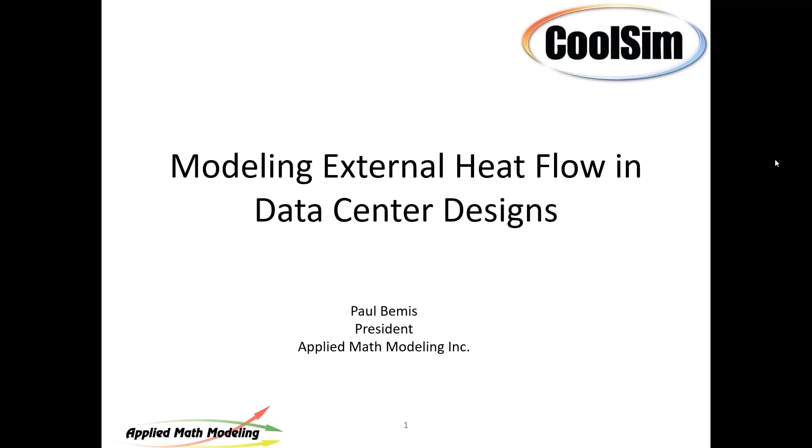We're talking about modeling external heat flows in data center designs.

A little bit about our company, Applied Math Modeling. Most of you know us at this point, we've been around for quite some time. We are a partner of the Ansys Corporation. We came out of that corporation where I was a senior executive for many years, responsible for their products. And this one we built in a bit of a skunk works while I was there, and agreed to take it private, a little small for them as a big corporation. So we are a partner of theirs now, and we deliver this solution in a SaaS model, software as a service, which is really quite nice, particularly for this kind of analysis we're doing today, because it tends to be computationally intensive and take some more time to solve than internal flow models. We are experts in the field of CFD, sales, development, support. We do consulting as well. We can build these models and run them for you if you choose, or you can use our CoolSim software and do it yourself. Either is effective.

So let's talk about modeling external heat. We've done a fairly good job inside the data center over the past 20 years. Things like hot aisle, cold aisle containment, variable speed fans have all contributed to the goal of getting the heat out of the building, out of the room. However, it's now outside, you've got a bunch of heat outside. And of course, given the cost of land and space, the architects typically - I don't want to single them out - but it's often a result that you have these locations outside the building that are made up of a bunch of heat exchangers. They could be chillers, they could be condensers, they could be whatever, but at the end of the day, we've got to get that heat out of the building and pump it into the outdoor air.

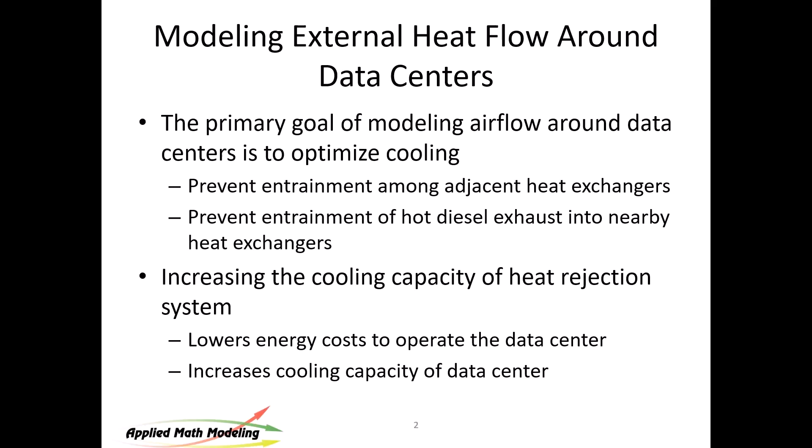So you need to be sensitive to the fact that under a prevailing wind condition, there is some probability that heat gets mixed up with your heat exchangers, which are actually often co-located, causing all kinds of issues that we're going to talk about today. And what happens is, if the cooling system gets warm inlet temps, if the temperature coming into the heat rejection system, the condenser itself, the heat exchanger, gets too high, then their cooling capacity drops off non-linearly. It's quite fast. So cooling capacity can be diminished if the heat from anywhere gets into the intake of these devices. So that's what we're going to talk about today.

Now, an example here is what you would normally see as a heat exchanger structure. This is just representative, you see over here, I've clipped one out. They all sort of look like this, whether they're chillers or condensers. Now, a chiller will have a box over here where the compressor sits, but it still has a big long array of these, and the more of these the better, because it's trying to dump heat to the atmosphere. And if you don't have to compress it, you can save a lot of money. So they use a lot of these. These are typically water to air heat exchangers, they don't have to be water, they can be something else. But there's certainly air on the outside, and they're dumping heat up through this vein on both sides and out through the top. So it's important that you know the physical dimensions of this, because you're going to build these. I'm going to teach you how to build these, and what the physical characteristics are - most importantly, mass flow rate and delta T. How much heat are you dumping?

Remember that the second equation of thermodynamics for convective heat transfer is that heat equals mass flow rate times specific heat of air times delta T. So it's these three elements, heat, mass flow, and delta T, assuming the density remains relatively constant, which can vary depending on temperature, that determines how much heat these devices can reject.

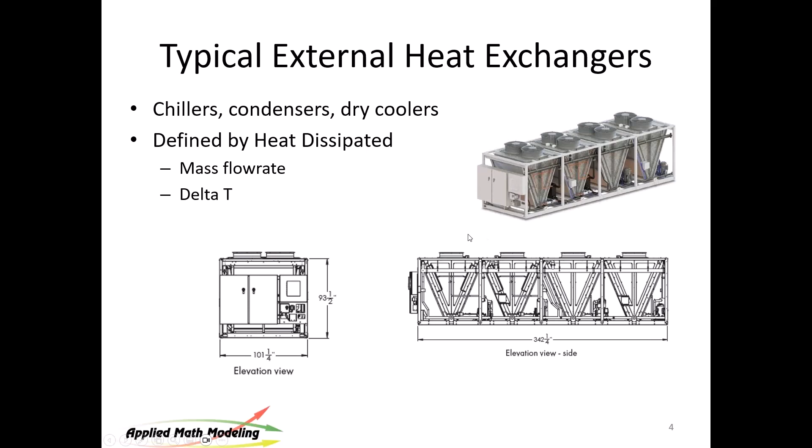The reason we're doing it rectilinear instead of as an angle is mesh size, mesh count. In CFD, we fill the volume with elements. We tend to fill them in CoolSim with hexes, so we're hex dominant, and if we use hexes, which are rectilinear in nature, then using a rectilinear structure will keep our mesh count low and give us fairly good results. So that's how we do it, and it works quite well.

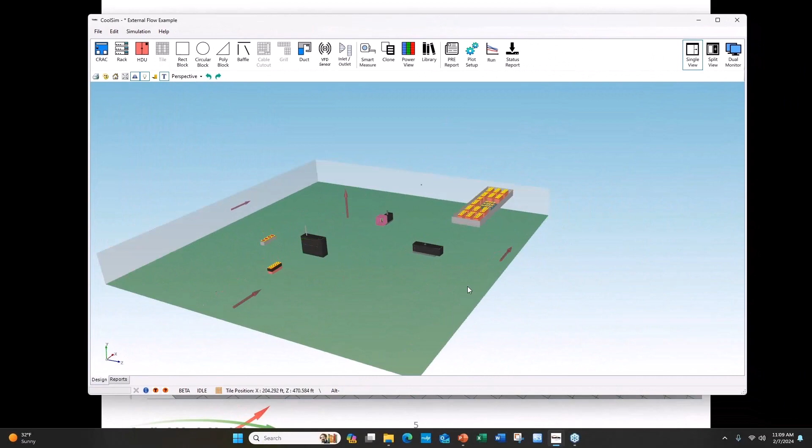So there's a basic structure. There are a number of these you can build, and you can build them different ways. This is one way to do it. What I'm going to do here is show you a couple of these using my CoolSim application. Now, whenever I do this, I run the risk of technical difficulties, so just bear with me if something breaks. Here I've got both generators and heat exchangers.

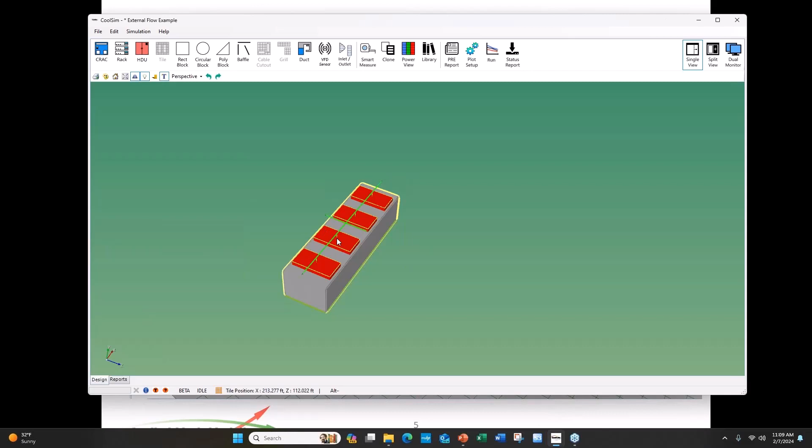Now, there's a couple ways you can do this. If there's a lot of them, and the data center is really quite complicated with a lot of equipment, you can represent the array as a singular structure across, one HDU instead of two. So I could take the array of 8 that I just showed you and turn it into an array of 4 and get an equivalent answer. Now here, this would be equivalent to 2 of the earlier fan structures I showed you, and you would therefore take the total mass flow rate and the total heat load and so forth and do it this way.

This isn't too bad, and it creates a smaller mesh. We're all about the mesh because that's where it takes a lot of time. Underneath this structure, what you do is simply set up a baffle, so you can see it comes down into that area, and you're pulling air up through. Essentially, all you want to know is the approximate average air temperature in that region.

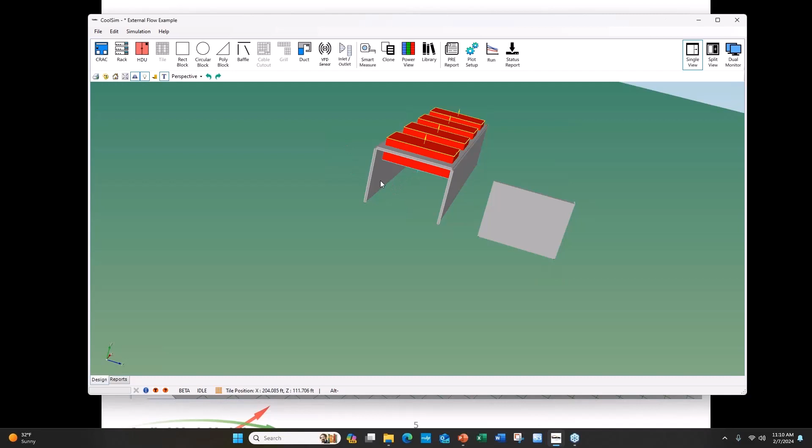That's all you're really looking for. You want to know wherever these are placed, if anything's getting in there, if any other entrainment from an adjacent device is getting in there in terms of heat. So you set these to leak.

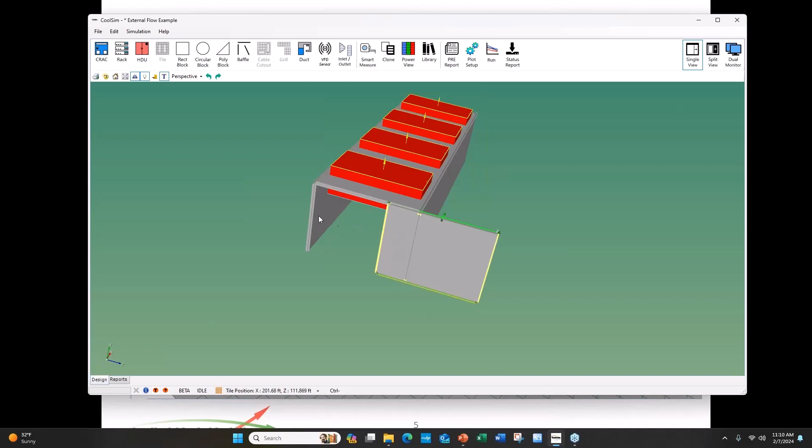The great thing here in CoolSim, we have leakage. The leakage here is set for 90%. You'll want to make sure that you line everything up nicely, and fortunately we have great tools for that. You can close gaps in the X direction, and then close gaps in Z. We have this nice close gaps feature that allows you to line those up nice and clean. If you're not lined up, you're going to get issues in meshing. Again, CFD is all about the mesh, getting the mesh right. We're hex dominant, and you're going to want to line things up as nicely as you can.

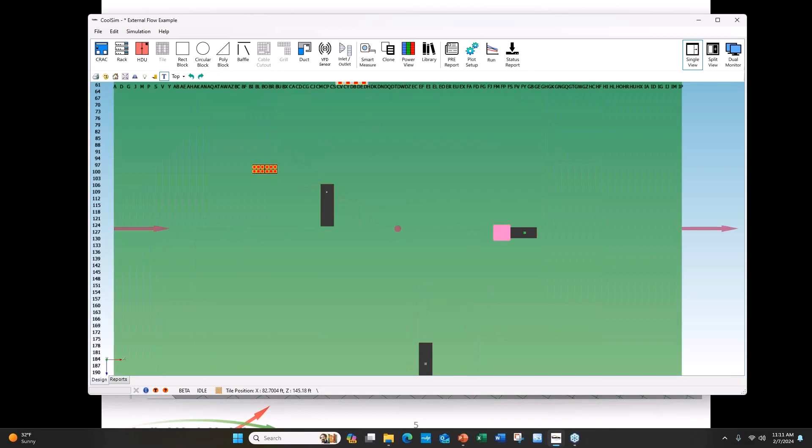The other nice thing about CoolSim is it allows grouping. Once you have a structure set up, like the one I just showed you, you can group it. I've just rubber banded it, and now there's my tree of what's in it, and I can group it. The great thing about a group is that it allows you to not only Control-C, Control-V the structure, the whole entire group, but it also allows you to clone it.

These are often lined up in data centers as a group or array, and this really helps the meshing to get these things lined up perfectly. A clone is just simply a copy with offset, copy paste with offset. So here I'm going to offset it - let's say 10 feet in the Z direction, and I'm going to put 3 of them in place. It allows you to just lay these things out really quickly.

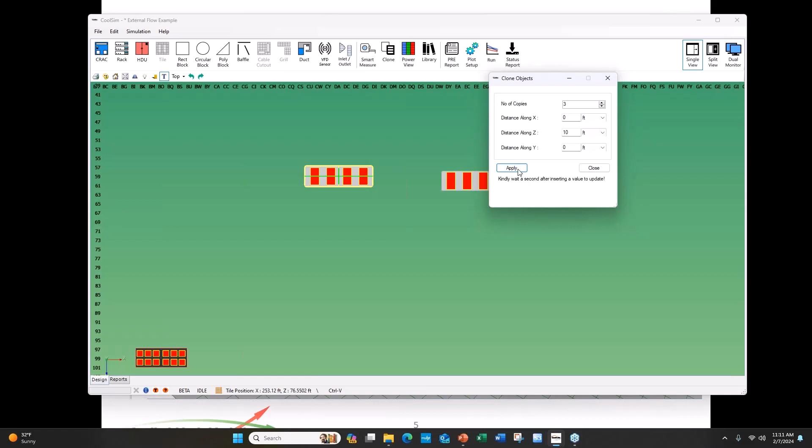The beauty of that is that you can set a model up really fast by creating just the base structure, getting it the way you want, and then cloning it. When you clone it, because I only cloned it in one axis, everything is exactly lined up perfectly, and the mesh is going to be as small as it can be without getting into trouble on that front.

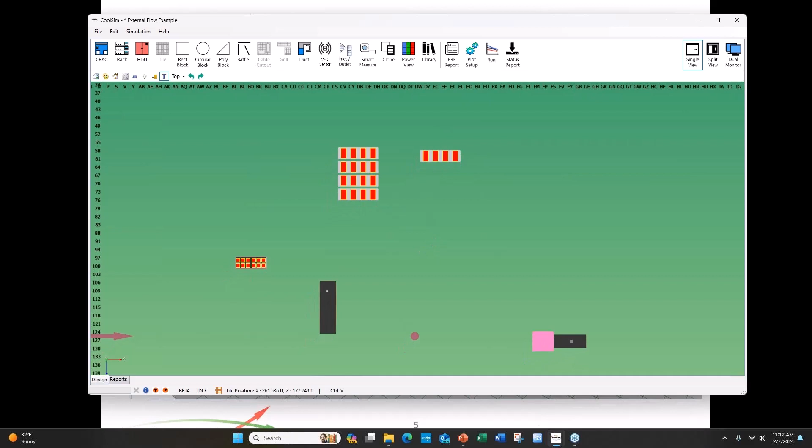So now that's just one type. Here's another one you can use - a structure like this one, which allows a little more detail. Here, the user has created a structure where there's a block at the bottom. You can ungroup this, take it apart. This is a block, as I showed you earlier, that they put in. You can make these devices the same height as the block, and they'll work fine, so make them coplanar. Then down below, leakage for the inlets.

That's how those structures are built in CoolSim. Let's switch to generators. Generators are another thing you're going to want to try to create and get to run. Generators are challenging because the sizing of them is quite disparate compared to the size of the domain itself, particularly the exhaust pipe. So these things tend to operate in this range.

This is a 3 megawatt device, a diesel generator. You see the intakes along here, so it's pulling in air. It uses turbochargers - you can see them here. It's usually a V16 type of device.

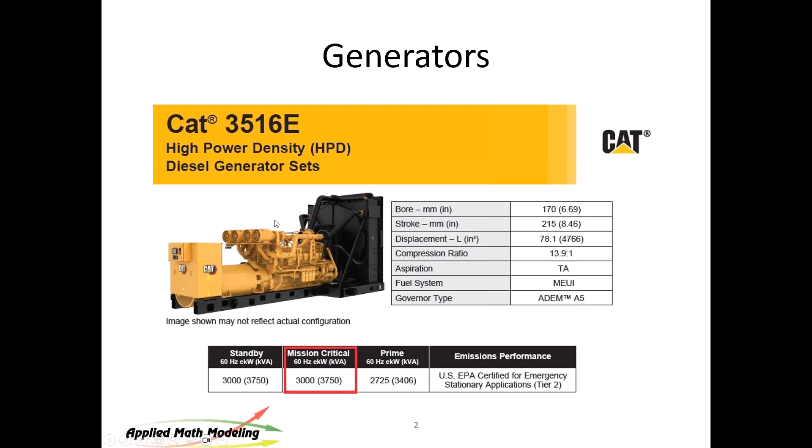There are 2 things you need to worry about when modeling it. One is the air coming through into and out of the heat exchangers that are cooling the engine itself. The other is the diesel exhaust. They generally don't sit like this, of course, in the outdoor environment - they come in a box. But this is the kind of data you want to look for.

This is the generator specification for that particular unit, and I've circled the things that are important right here. Radiator airflow - you need to know what the mass flow rate is of that inlet. You also need to know the approximate size of it, which you can usually get from the CAD drawing of it or the cut sheet of it.

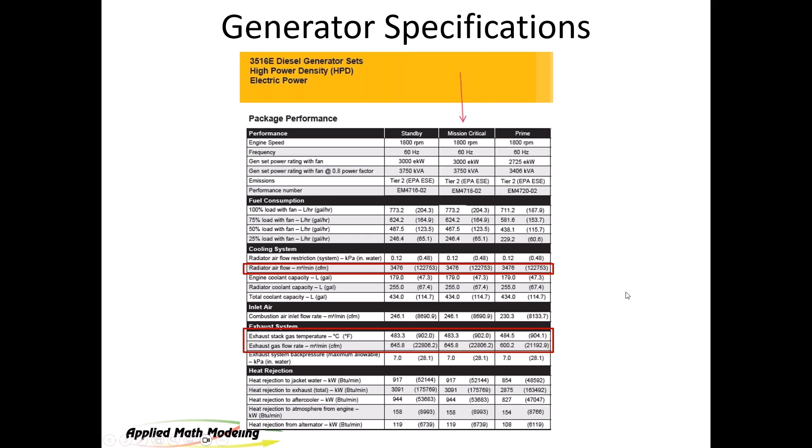You need to know the size and the mass flow rate, that'll determine the velocity. On the exhaust side, you need to know the mass flow rate, the approximate diameter or size of the exhaust outlet, and its mass flow rate. Those specs are given here. About 22,000 CFM is normal for an exhaust pipe of a diesel generator. 900 degrees is normal. They generally dump about 122K CFM of air to cool them.

They often look like this, in a box. On this one, there's cool air inlets in two locations, and then there'll be an outlet on the back. The packaging of them does vary a bit, and that's why it's difficult to build a single model of these things that represents the entire situation. It's much easier just to make one in CoolSim.

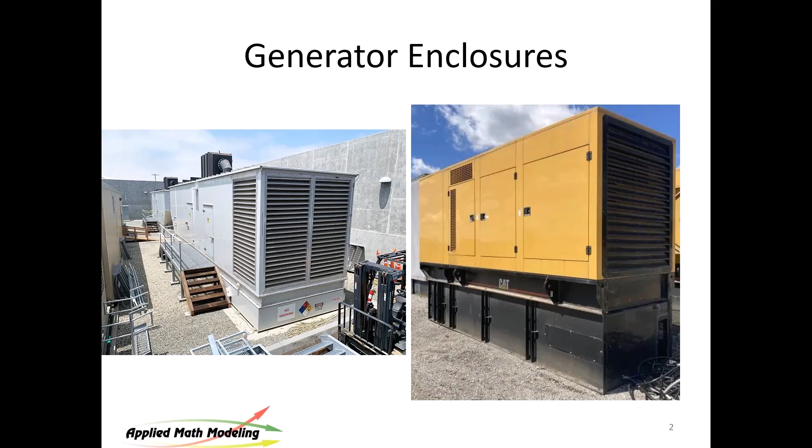Here's an example of how you make one. We have a new object in CoolSim called an inlet outlet. It's just a flat plane, and you can set the size. You can see there's one here on the intake, there's an exhaust right there, and there's one on the outtake.

Air's coming in through this end and being pulled, not literally, by the way. All these are surfaces on a block, so there's no air literally moving through the block. A common misunderstanding in CoolSim is that there's air moving through the block for racks or CRACs or anything. There are not. There's just a surface on the front end that we set a set of parameters on and do mathematics. This is all done mathematically.

So we're pulling air in here, and we're dumping it out here, and the most important one is the dump. The inlet you can set as well for the same parameters. You notice there's an arrow, it's pointing in because it's pulling it in. But pulling in doesn't bother quite so much as the exhaust.

The exhaust coming out is hot, so it's running at about 120 degrees Fahrenheit typically. It does depend on the design, but that's not unusual. Here this one's set for 110, and about 110 to 120,000 CFM. This one only has one outlet, though some have more than one outlet.

This one's very important as well, because this is the diesel exhaust. This is usually about 18 inches by 18 inches. You see it's represented again as a rectangle, but it's actually a round surface. To save cells in terms of mesh, we model it as a rectangle.

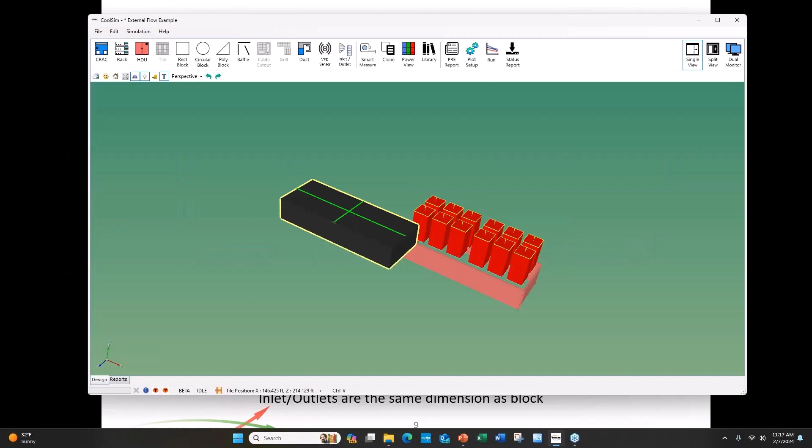So let me go back over to my CoolSim for a moment and show you how to build those. Let me just back up a little bit. This is CoolSim again. Here's an example of one right here.

Now this one has two inlets, one on either side. You can see those inlets, they're coplanar, and then the outlet right here. And then there's a block representing the chimney, and at the top of the block, there's an outlet.

And the way to, again, this is a group. Once you've built this, you can actually write it out. You can export it to a file as a CSO file as a group and read it in as a group. You can also save it to your local library if you want.

So if you want to build a few of these and put them in your local library, you can. I tend to write them out to a share drive, and that way it's on the network, and if I'm on a different machine, I can grab them from there. So I use a share drive for most of my CoolSim work.

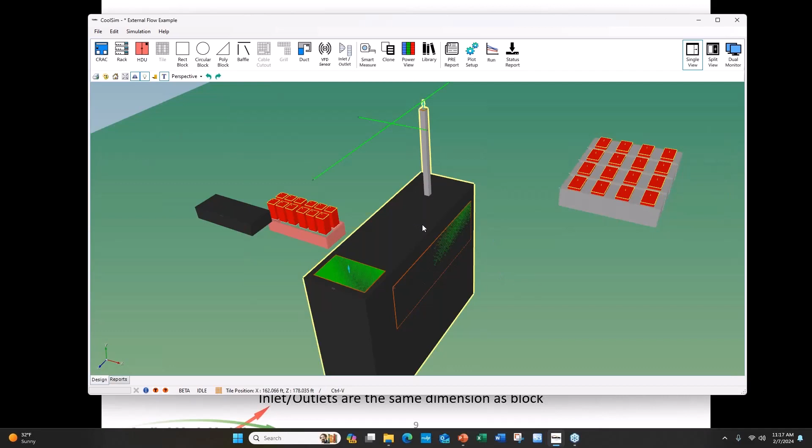But let's just ungroup this for a moment and take it apart and see how it was done. Now, these surfaces right here are a little difficult to pick sometimes, so what I tend to do is hide the block. We have a hide feature, and then you can get at all those surfaces.

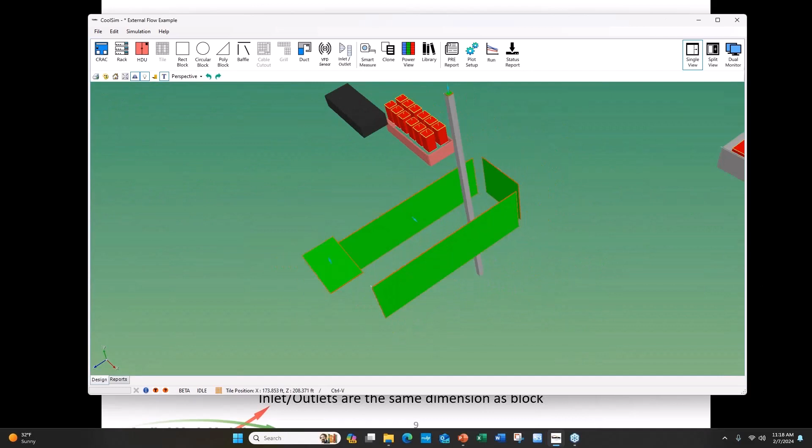You see this one has one outlet over here, this is the outlet. And then these are both inlets where the air comes in, and then it has another outlet at the top.

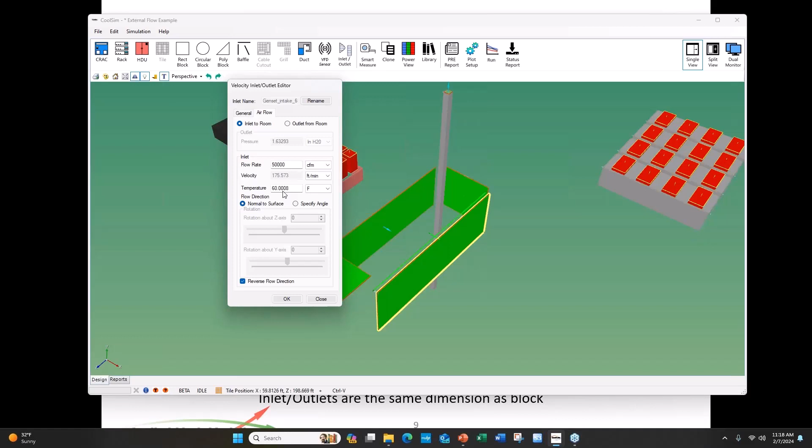It simply depends on how the original spec was set up. Once you set these parameters, you just click on them and set them to be whatever's necessary. This one has been divided in half, so 50,000 coming in. Temperature doesn't matter on the inlet since it's pulling it.

Only the outlet really matters. You see the outlet here is probably going to be in the range of 126, and this one's dumping at 109, probably a little low, but it depends on the spec of the device. So that's how you do that.

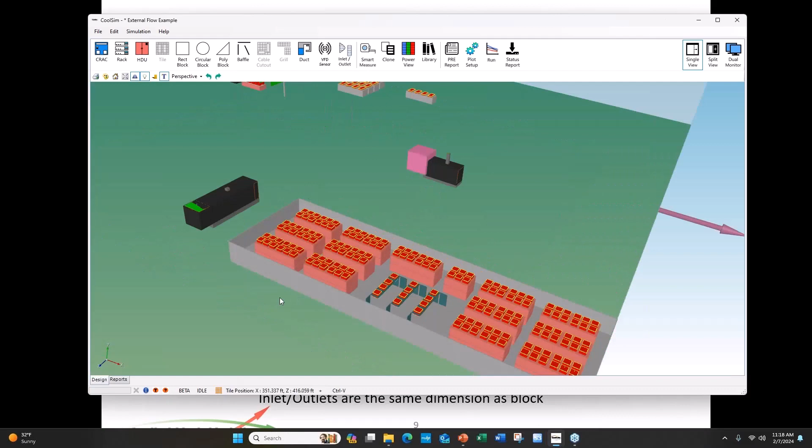There are different configurations. Here's an array of condensers up on a roof that I grabbed and wrote out at one point when I was working on a project. Here's a different one over here.

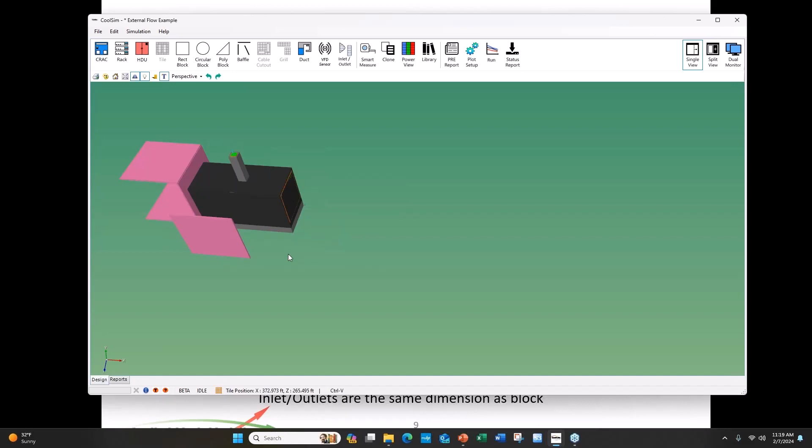In this case, they had some sort of inlet box, again built out of baffles, so you can ungroup this and pull them apart if you want, but that's how that one was built. You can write these out, save them, and read them in to use again in the future, or modify them and use them in a different style. Very easy to build, and with copy paste and cloning, it makes it nice to work with.

We've also most recently added to our group feature the ability to edit the group, which allows you to manipulate it, and you can also rotate that group. That's a handy feature to have in case they're not all lined up the same exact way.

So we've added a few features. This will be a growing area for us in terms of capability because this is becoming somewhat common. What we do in CoolSim is typically pull in functionality that we see common. If you start to see 80%, 90% of the time that kind of frequency of use, you start to say, okay, how do I automate it and bring it into CoolSim and make it something that can be easily used?

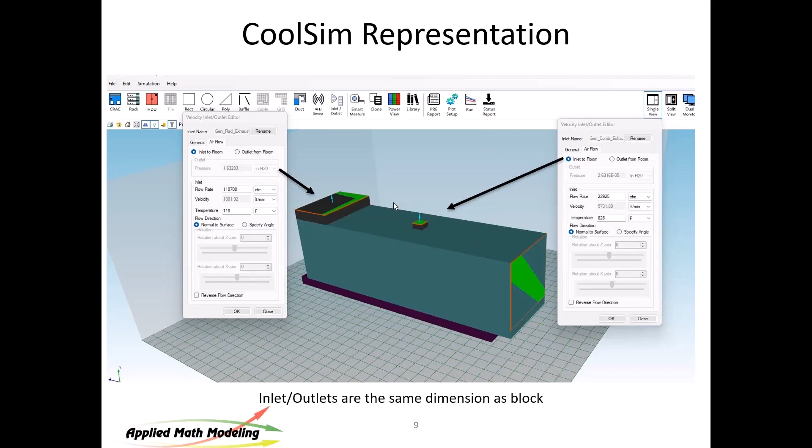This is an advanced topic typically. When I did this kind of work at Fluent, you'd do all this by hand—hand mesh it, hand process it, hand post it—and it takes days to do a model of this kind. But with CoolSim now, we're able to do this quickly, efficiently, and run various scenarios in hours. It's really a game changer.

Now, setting up the domain. When you set the domain up, this is the big room, the flow domain, as it's commonly called. We used to call it a bounding box when I was at Fluent. This is the size of the domain in which you're operating.

Typically, it should be 3 to 4 times the length of the building on the windward side—if you're a sailor, that's the side the wind comes from. The leeward side should be at least 3 times, because we've got to resolve the mesh.

The cells—remember, we break the volume up into, in this case, hexes, three-dimensional hexahedrons—and then we solve the conservation of mass, momentum, and energy on each surface and interpolate it across the cell, and we have to converge it to an accuracy of typically 10 to the minus fourth. So we're looking for good resolution, and to do that, you need enough size to do it.

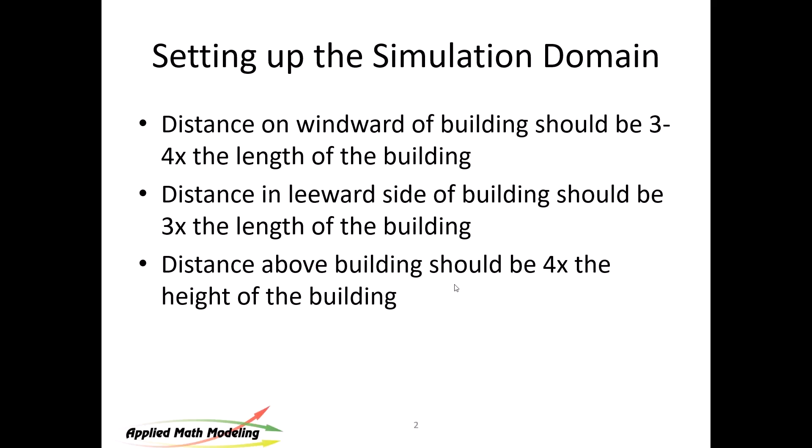And then on the top, 4 times the height of the building, because it is a three-dimensional block.

Now, we've also added in CoolSim some tools to allow you to set the wind condition up. This is normally done in a code like Fluent using unit vectors. If any of you have ever worked with unit vectors, it takes you back to your days of trigonometry—cosines, sines, transcendentals—and it's not trivial. So we came up with a method here with a nice little GUI.

So we have a compass and an air indicator. The compass can be offset, because oftentimes you'll lay a model out and find it's not quite facing north—the building's facing northeast. So this allows you to do a compass offset.

So you can just offset the whole orientation of the room, or the domain, with respect to the building, and then you can set the wind speed and condition according to whatever the prevailing wind conditions are for that particular region that you're working on.

You can set the velocity. We've got miles per hour, kilometers per hour, and a variety of other units. You can also set the air temperature in a variety of units.

And we have a hyperlink to wind data, which takes you to the NOAA site and allows you to look at some of NOAA's data on wind. Wind data can be specific to a particular location. I have a lot of global customers, and NOAA primarily focuses on US data, but there are also local windroses you can get for your geography, wherever you may happen to be, that allow you to understand prevailing wind.

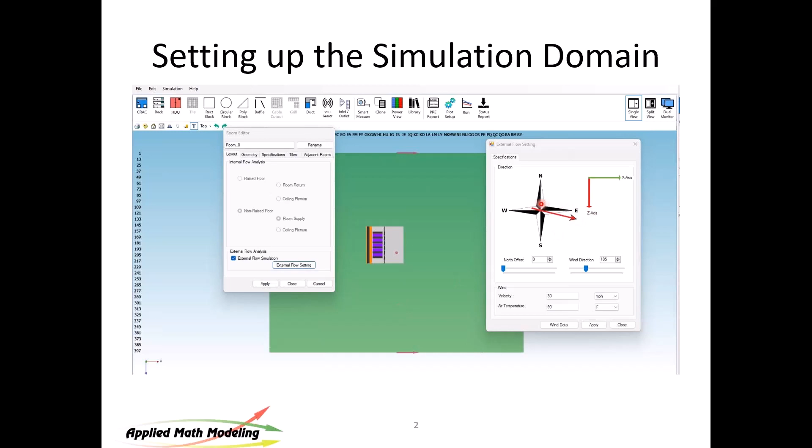These arrows you see in the domain show the wind direction. Right now it's slightly off from the east, so it's blowing left to right in this case, but you can set it any way you want.

You also have to orient your building with respect to the Earth. The best way to do this, the way I do it, is go to Google Earth or Google Earth Pro, dial in on the area where you want to put your data center, and take a cut of the CAD drawing of the data center and lay it into where they want to put it.

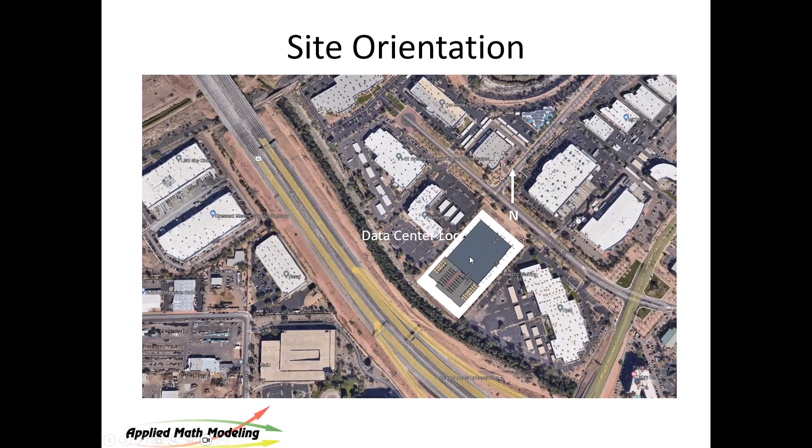In this case, this was a consulting project, so make sure the customer is consistent with where we're going to put it. Then find north using Google Earth, and find out the approximate orientation of the building relative to north. You're going to need to know that.

The other piece of information you're going to need, if you don't already have a prevailing wind in mind, is for setting up the simulation domain in terms of wind speed and wind velocity.

This is a windrose. I don't know how many of you know what a windrose is, so I thought I would show it to you. This windrose shows us the probability and strength of wind.

You can see that wind of 10 to 14 miles per hour occurs at some interval. That's probably the worst speed, but it only occurs a percentage of the time. In this case, about 6% of the time we've got a wind blowing from the east.

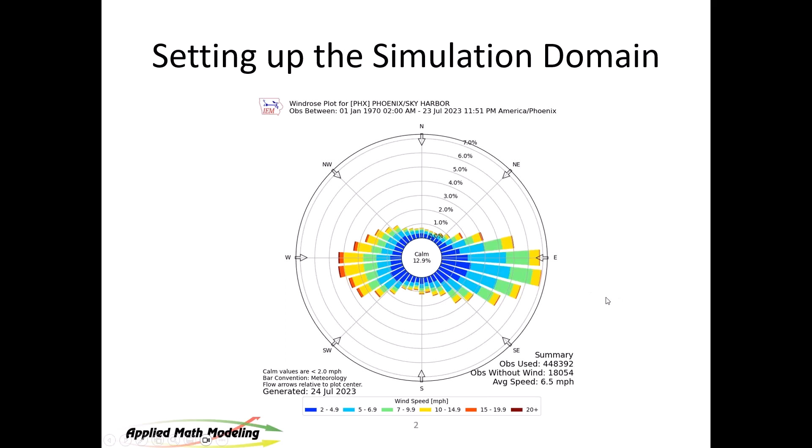Over here we've got a little red, meaning we're up to 15 miles an hour from the west, and that occurs some percentage of the time as well, about 4%. So if I were modeling this data center, I'd probably want to look at wind from the east and wind from the west, maybe offset them a little to understand the impact. Most of the time this place is calm, but you do have some wind conditions, and this happened to be Phoenix.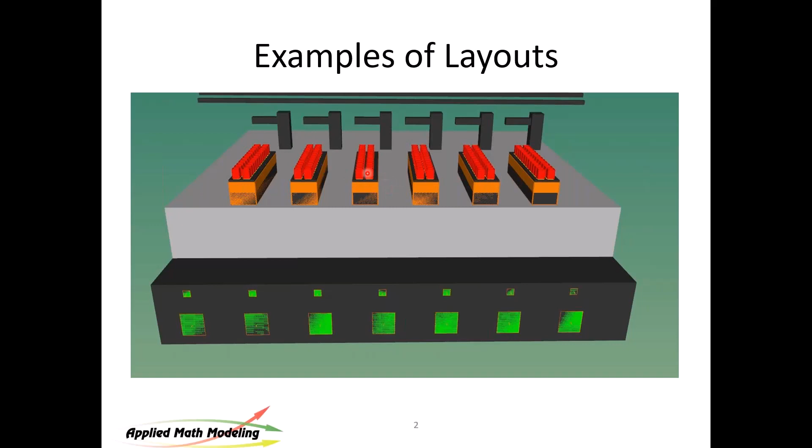And then, of course, you've got all the heat exchangers and chillers sitting up on the roof. So this one could be problematic, particularly with wind moving in this direction, perpendicular to that surface. It may blow this hot air up over the ledge, over the edge of this top building, and contaminate the leading edge of these devices.

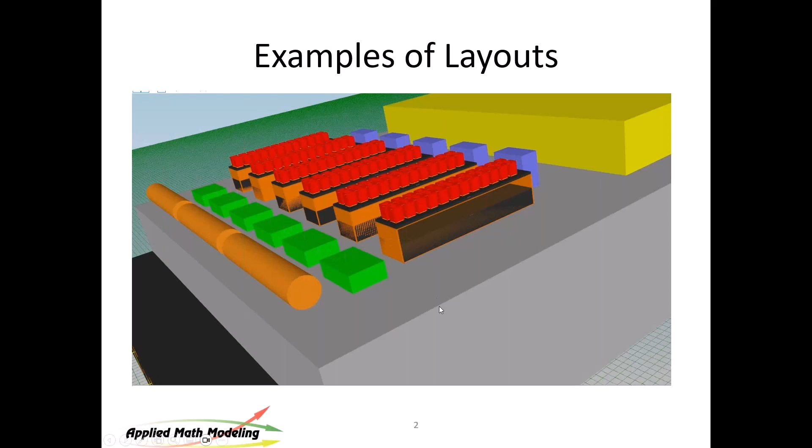Another example here. In this case, there's some structures in front of these heat exchangers. I think the goal here was to get these further back on the roof so they're not being contaminated. This is the same variation of the same design I showed you before - the generators are down here and they're blowing heat up over this edge. It's okay to have other stuff up there, but let's keep the heat exchangers as far away from that hot air as we can get.

So I'm going to give you some examples. Let me check the time, 10:28. Okay, we're making good progress here, and I haven't been looking at my questions.

Is the CoolSim software a modeler and a solver? Yes, it is, it does both - we create the model and solve it. That's the point, and I'm going to show you some solutions here.

And the mesh is automatic. We automatically mesh these - all you do in CoolSim is once you set this thing up, you press the go button and it meshes. We use meshing technology from Ansys, it's all Ansys stuff, state of the art. The latest Ansys releases is what we use in our solve, which allows us to ride that technology curve and deliver those solutions to you very cost effectively.

But we do it for you, based on experience we have in meshing - some 30-odd years of experience in meshing. So we set the meshes up and run them for you, and if it fails, you'll get a fallback, and we'll get copied on that fail and help you debug it. That's how we do it, and that improves the pipeline over time for others.

Okay, so let's take a look at some results and keep asking questions. I'll keep trying to look over there and answer them as we go.

So here's an example of entrainment. One of the nice things about CoolSim is we give you hyperlinks to output. So when you run a job, you not only get the solution done and get to look at it locally, as always, but you also get this hyperlink capability, which allows you to open and view it on the internet. This is something I've been trying to do nearly all my life in 3D graphics - to be able to view results on your phone. I can see this on my phone, and in fact, I can send this to you as well.

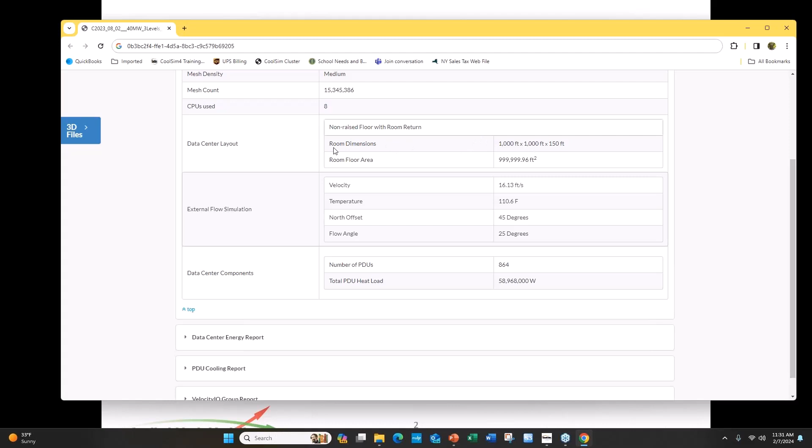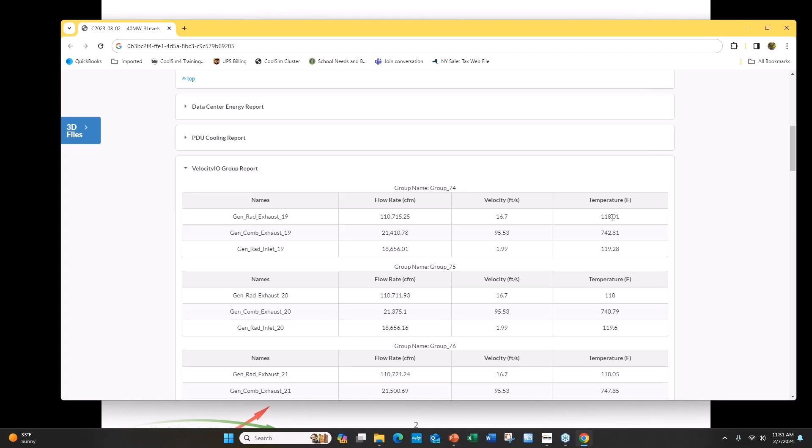It also gives you an independent report of the analytics of each one of the I/O devices. Here's the generator, with inlets and outlets and temperatures. You see the exhaust is flowing at 700 Fahrenheit, and the exhaust of the heat exchangers themselves is running at 118. So this is all the analytical data over here.

Here's the PDUs dumping heat. You can see they're running at about 17,000. We've got a delta T of about 14 degrees there, and we're dumping 68 kW per entity.

But the most revealing is this one down here called Pathlines—pathlines from racks and PDUs. Again, this is a new release, so these things are growing.

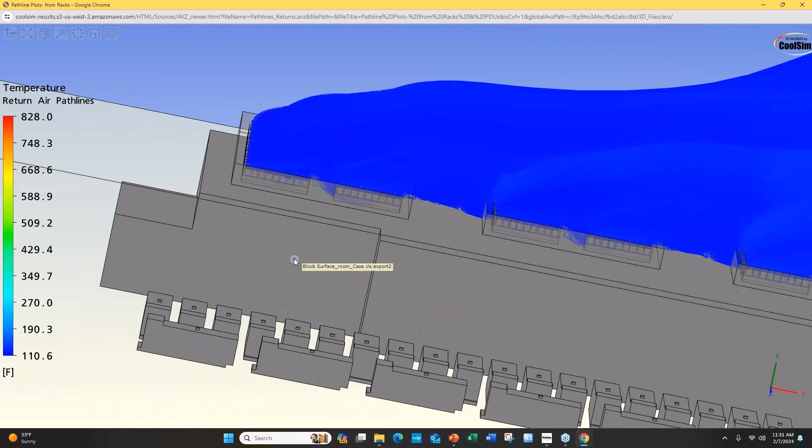Here's an example of flow on a prevailing wind coming from those devices up on top. We have a bunch of heat exchangers sitting on the roof of a fairly large data center, and as the heat comes out and the wind blows by, we get various effects. Let me show them to you.

This is Ansys technology I'm using, but we provide it here as part of CoolSim, and it allows you to see these path lines. As the air goes by and gets to this back edge, it pulls it down because there's a pressure gradient right there. Whenever wind flows over what we call a backward-facing step, you get a gradual pressure variation that causes that to pull down.

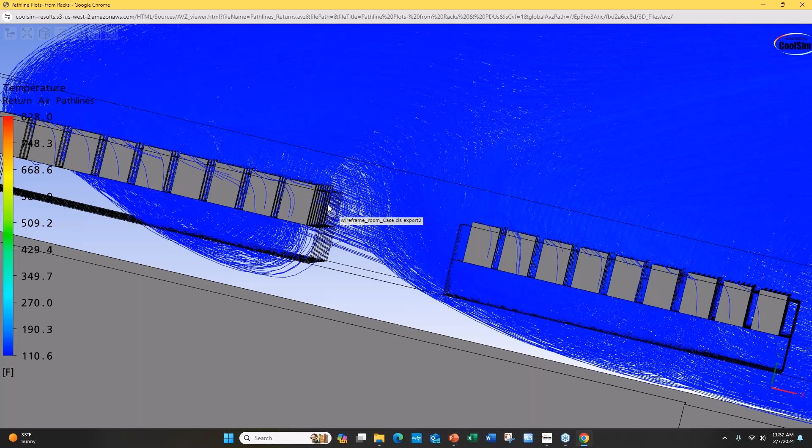You often see this—it's why the back of your car is always dirty in the wintertime in New Hampshire, because you've got a low pressure there, and as the slop goes by, it wants to collect and swirl right there. That's what we're seeing.

We're seeing this heat come out of the top, and instead of going up into the atmosphere, some of it's pulling down and getting entrained into the rest of those heat exchangers. That will cause their performance to decline. It happens in the leeward direction.

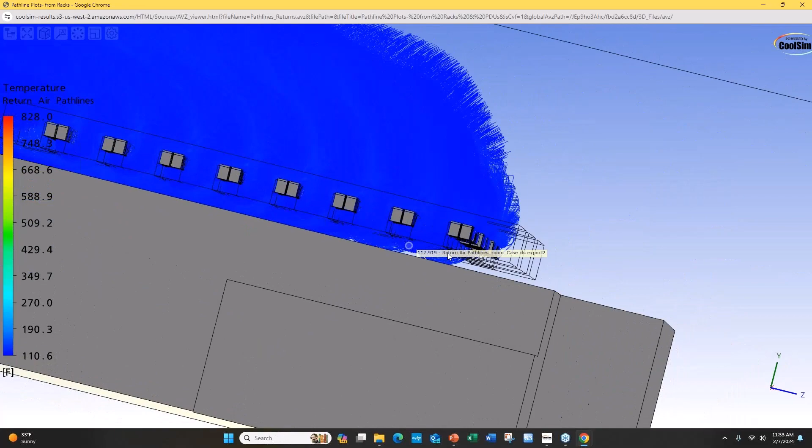It also happens side to side—in some cases you'll see it going from one to another, wrapping down around and going into the one beside it. So this is the problem we're trying to solve, and you see it going way down underneath.

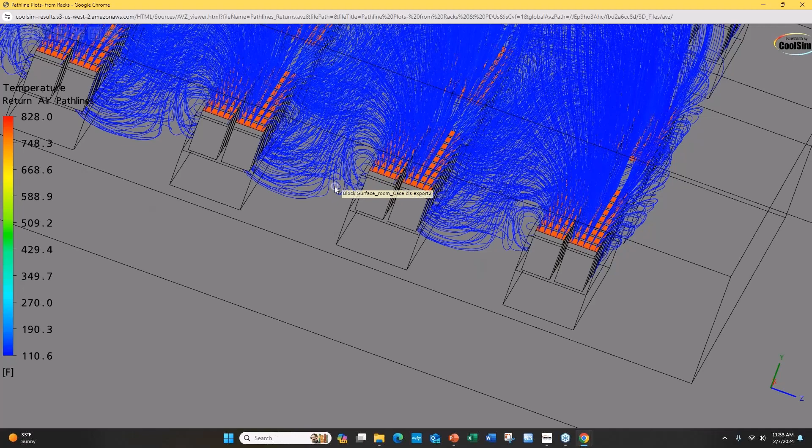So what do you do to solve it? Well, just like in hot aisle, cold aisle containment—you can see them going down right there, how that one goes right down underneath. This is a very common thing I see: the exhaust gets sucked into the intake, because the intake is running at a lower pressure.

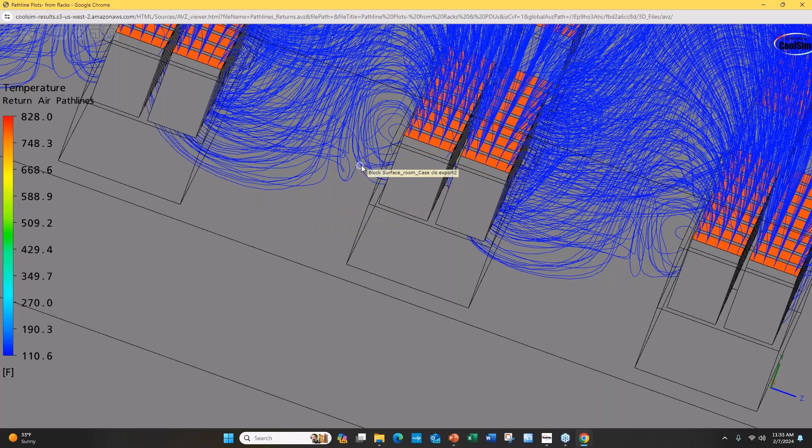The other reason is usually a screen right here, which causes a low pressure on the back side of it. So down low near the surface of the roof, you've got a lower pressure than up on top, and that tends to pull the air from the exhaust down into the bottom. They just recirculate on themselves, causing efficiency to drop off quickly.

A couple of ways to solve that. One, you could put a block across here, like a steel platform that didn't allow air to pass through it—similar to what we do inside the room with hot aisle, cold aisle containment. The other thought is to extend these up with chimneys, pushing them further into the air so the distance between exhaust and intake is greater, reducing the probability that recirculation will occur.

Now, those solutions I just described come with costs, and you have to discuss those with your customer, but that is what would prevent it.

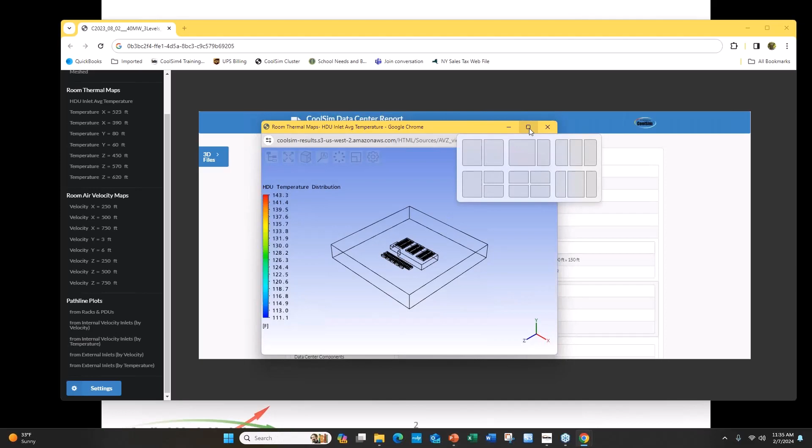Now, in terms of showing you the impact of that, there's a plot we added in version 5 called HDU inlet average temperature. This is really the most important plot probably in this set. There's a bunch of temperature contours I'll show you in a moment, and velocity contours if you want to look at those, and also some other elements here. But this is one of the more important ones, the HDU inlet average temperature. It takes a while to build because it's made up of a lot of very small elements. But let's take a look at this closely.

I'm going to use a control key here called Y to put it into position, and the wind, by the way, is coming from the right to the left. I'm going to turn perspective off. And again, I can share this. I'm going to share this one with you. So copy. I'm going to go to the chat, to the entire audience, type my message here, Control V, and see if I can.

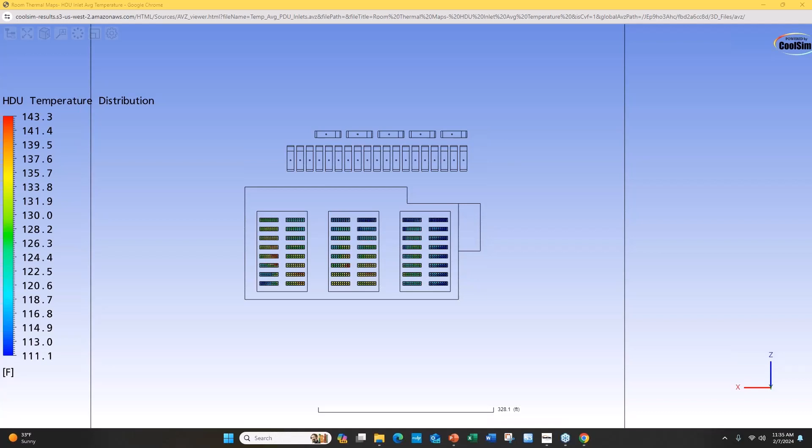So now in the chat box, you can click on the hyperlink and you'll see this image pop up. The reason I'm showing you that is this is an excellent way to share 3D images with your customer, your prospect, or your colleague. You can do it with hyperlinks. You can share it with your phone by forwarding a hyperlink. This is a hyperlink of this particular image.

I zoomed in on it, used a Y key to orient it so that it's facing straight up. Y is the upward vector in Fluent and then CoolSim. And you'll notice that as the wind is blowing from, in this case...

I believe it's angled, so it's definitely coming from the right-hand side, and it's blowing this way. You can see these are fairly cool, but as you get here, they start to get red. So the performance of these heat exchangers over on this end of the array is going to be very poor. Their inlet temperature is upwards of 143 degrees. The ambient air temperature is around 110 on this day. They're modeling it at very high conditions.

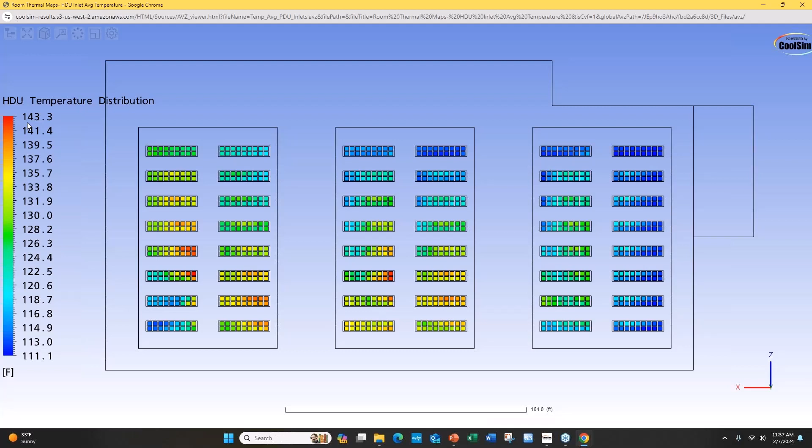Again, you look for the corners of your design, what we call the four corners. In this case, high temperature, worst wind condition is what you want to model to understand your aggregate cooling capacity on a given day. You can calculate it by understanding what that average inlet temperature is, and then determining the efficiency of this heat exchanger with an inlet temperature of 143 degrees. Or conversely, how hard your chiller's got to work to pump up, boost, or lift the pressure in the compressor high enough so that the cooling medium is well above 143 degrees.

So this is not a good picture. You want to try to avoid this. We call these Visine charts. Get the red out. You know, you got to get the red out of the image, right?

So a couple questions coming in. Can the 3D Pathline be constrained to show only a section of the model? Yes, it can.

What is the effect of the screen on those chillers with respect to the wind? You can adjust the percent area open on the baffles to represent percent area open on screens, so you can model that.

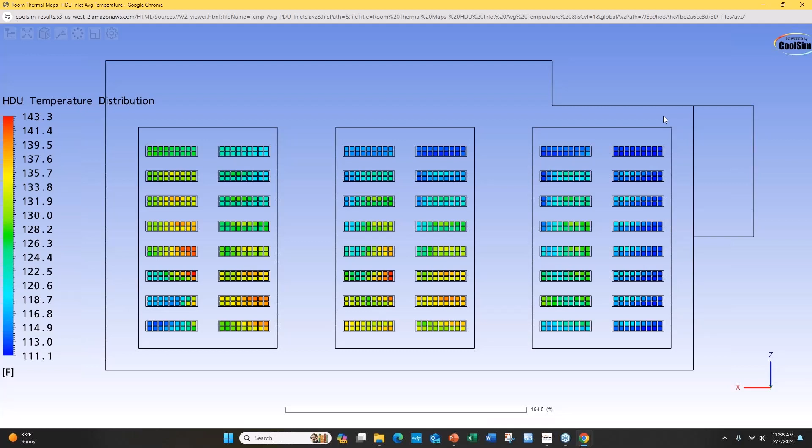What would you take into consideration regarding the windrose of different probability of wind? Consider the maximum speed, which is the maximum. Well, you can consider a lot of different things with the windrose. The windrose just simply gives you an idea of what to look for. It's a discussion with the customer about what they're most interested in at the end of the day. It often has to do with the orientation of the building and the location of these devices with respect to the building. In this particular model, you've got all of these generators sitting out here, yet we're looking at a wind coming from the right-hand side. That's because it's the prevailing wind. But another study I would want to do here is this direction: do these generators contaminate these heat exchangers under a wind that's coming from the top side?

That would be a study you want to do. To redo a study, all you need to do is just reset the model, change the wind directions, and resubmit it. Turnaround times on these models tend to be a couple hours. I was turning this one around in 2 hours, so that's not too bad.

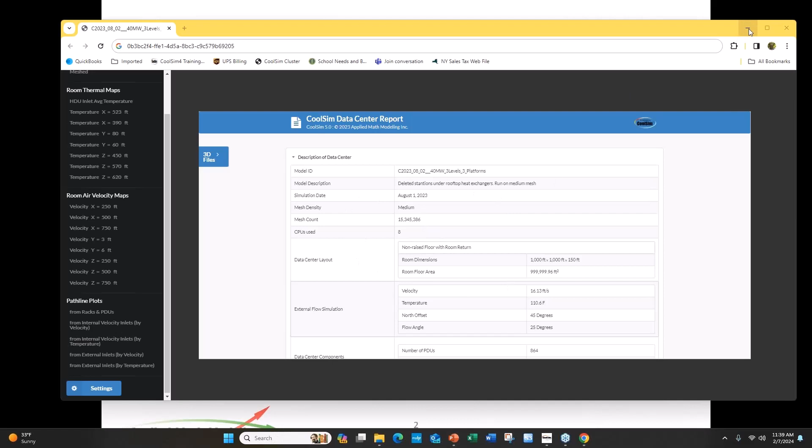It does depend on the mesh. The mesh in this case is 15 million cells. We ran it on 8 cores, so that probably took a few hours. By the way, CoolSim is automatically parallel, and you can run concurrent jobs at the same time. So that entire model meshed at 15 million cells on 8 cores. We use about 2 million cells per core on average, and we just keep adding cores until we have enough to meet the needs of the mesh. We do that all fully automatic. You don't have to, as a user, worry about that.

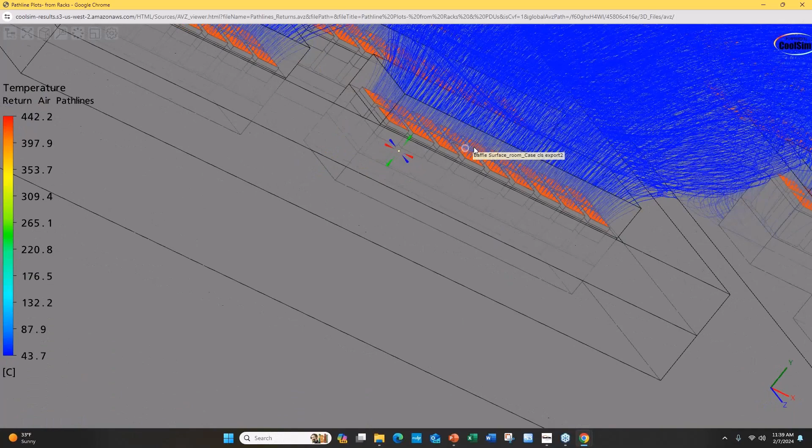So change is made. So here's another image. This is the same one, and here what we did is to simply put a plate in place. So here's the same model, but here we put a plate. You can see it right there. The plate separates the hot and the cold from one another so that you have less reentrainment, and you can see there's less here.

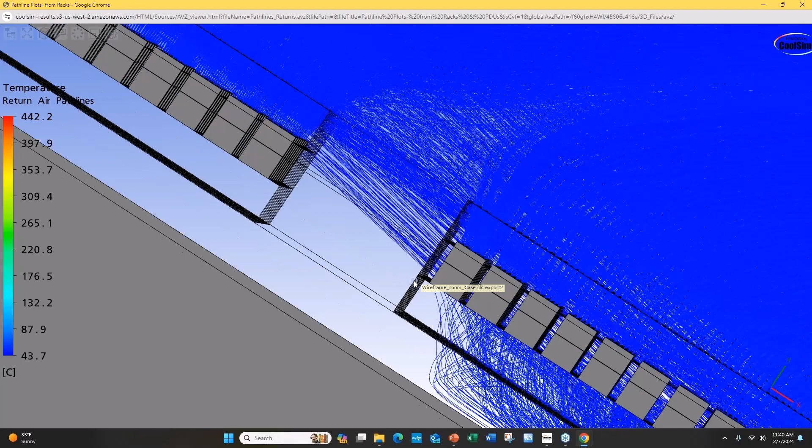So where before, let me just hide this body, right? Hide that body. So where before we had air coming down and going under this section really quickly, and let me rotate this a little bit so you can see it a little bit better.

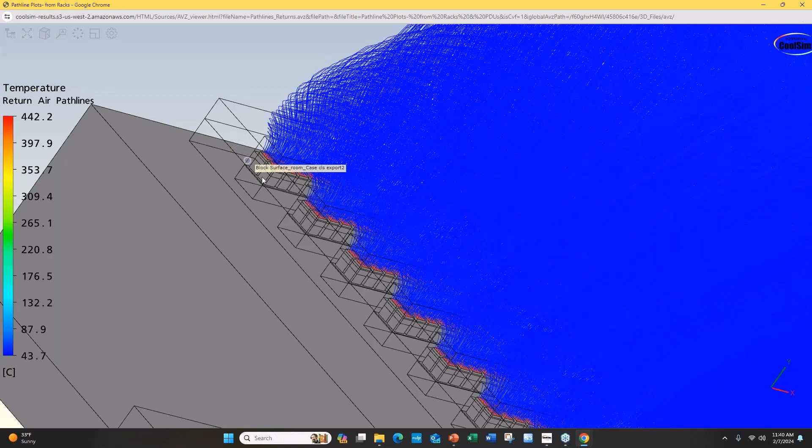Where before we had the air coming down and being pulled underneath really quickly, here it's not so bad. So same exact conditions. We've made a change to the geometry, put a plate in place. This is a separation plate between the hot and the cold. Now that's expensive because that doesn't have any percent area open and you've got to worry about water. So you might want to put a perforation on that. I can't remember if we perforated it or not, but putting a plate there will reduce it and improve your total outcome.

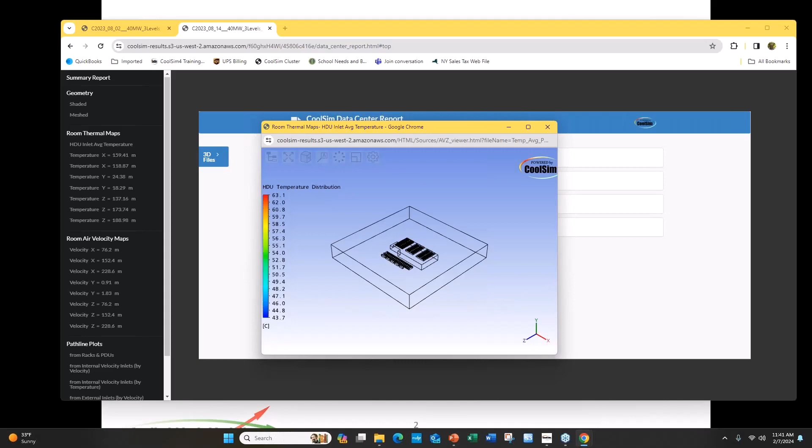And then it becomes a question of cost. Is this something that is cost effective? Is this something that the customer wants to do? What is the probability it's going to happen? These are all decisions made in the design process. And this is simply a tool to allow you to make better engineering decisions. That's all CFD does for you, is essentially give you more information from which you can then make decisions.

But you can see this one cooled off quite a bit. Now, this is in centigrade. Sorry, I have to flip that switch to centigrade, but you can see the range is the same as before. So up here is about 143 degrees Fahrenheit, and you can see there's fewer of them. The temperature gradient is further back. That in general, we got improvement.

Now, whether that improvement was cost effective compared to the cost of the implementation, that's a good debate that you'll have with the design team. Furthermore, we didn't implement chimneys here. You could try chimneys as well as an alternative. That might be more cost effective. I have seen that in some cases being most cost effective. So that's one I wanted to show you.

Another one here, and again, these are all hyperlinked shots that I'm able to just pull up because we support hyperlinking on results now. So I'm pulling this right off the cluster, and we're watching it in real time or manipulating it in real time. And you can do this from the comfort of your home. You can do this using your phone. And it is the first time that I know of that that's been able to be done, particularly on this complexity of a problem.

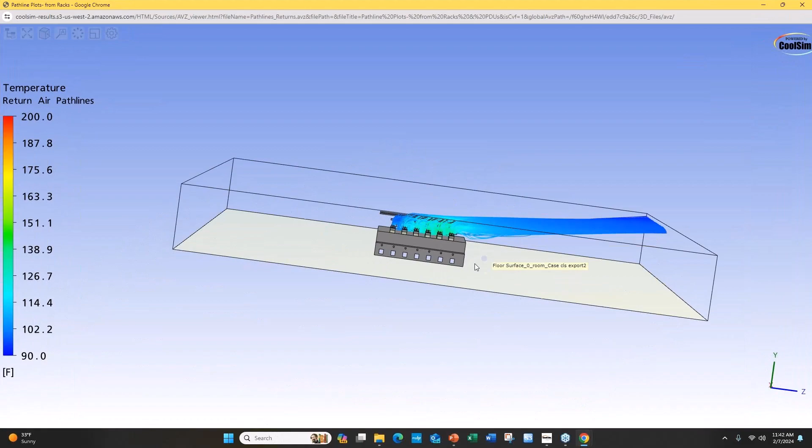So here we have rooftop air handlers. Again, I wanted to show you some of the reentrainment that occurs. Now here, there's chimneys that have been put on top. So this comes a little bit later in the cycle than prior. But what we're seeing a lot of here is reentrainment right from the exhaust into the intake.

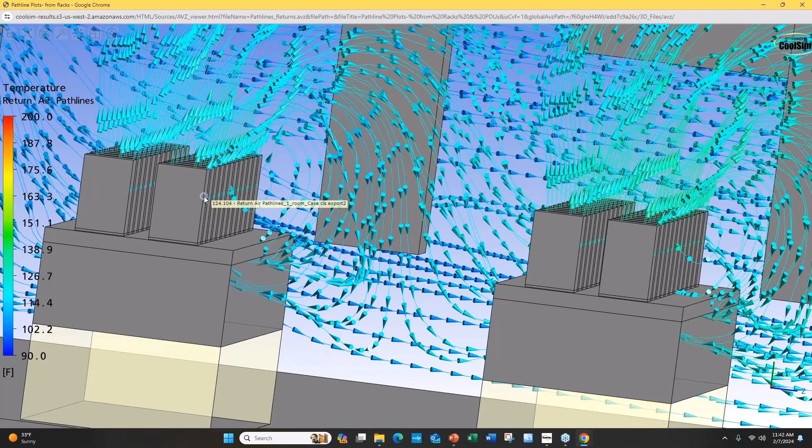And you can see chimneys have been added. In this case, the chimneys are made using baffles, 4 baffles, and then cloned. You can also simply make your HDUs taller so that the outlet is up higher, which mimics the effect of a chimney. You can do it either way.

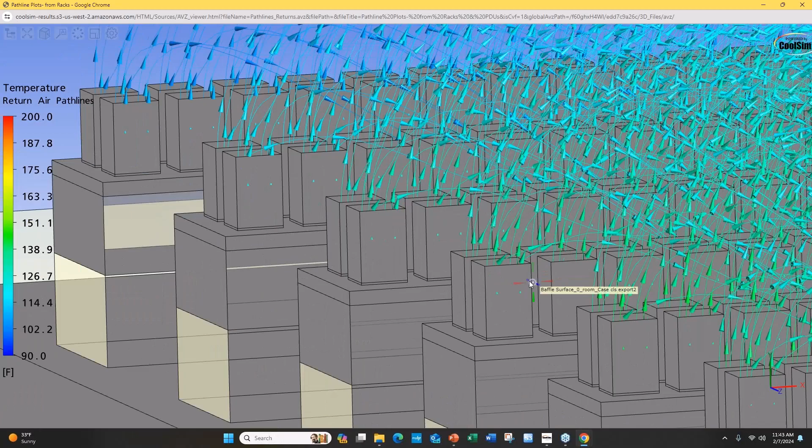I tend to extend the height of the HDUs a little higher to mimic the effect of the chimney, effectively giving these more room to go out into the atmosphere before the low pressure starts to pull them in. So that's a nice shot of what's going on there.

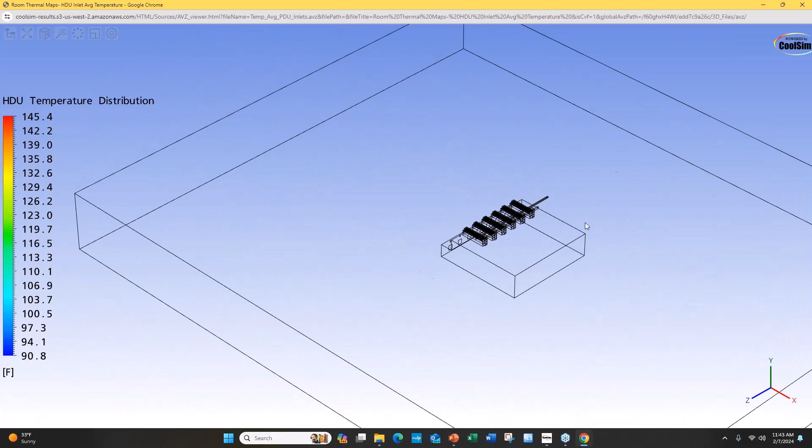Again, if we look at the HDU plot, which is this HDU average inlet plot, one of the more important ones, we'll see here that there's most likely some heat being generated on that side due to the wind blowing over this direction, and there's probably heat coming off these devices.

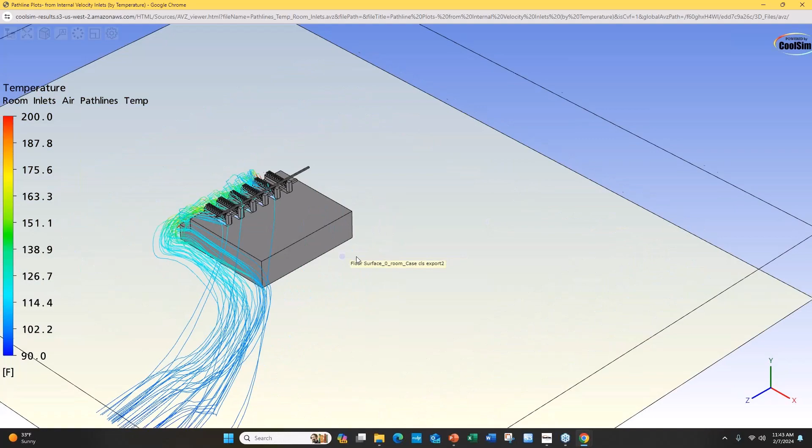Now we do separate the path lines here so that's a little easier to see. What I was showing you earlier is just the path lines from these devices. Let's go now look at the path lines from the generators themselves. They're down here in the velocity inlets by temperature. So these are just the velocity inlets themselves.

And you can see on this output that there is quite a bit of heat coming off those generators. In this case, these are the exhausts right here for the diesel generator itself. You can see those are running near 200 degrees Fahrenheit. And then here is the exhaust from the generators themselves blowing out the front, and you can see it gets wrapped up over the front of that.

So let's see if we can, there we go, and turn off -- I'm using keystrokes here, I used a Z and an N. And that's a pretty good shot right there of the problem. So as the wind blows, it causes this heat to come up and bang off that surface right there and get up into those intakes.

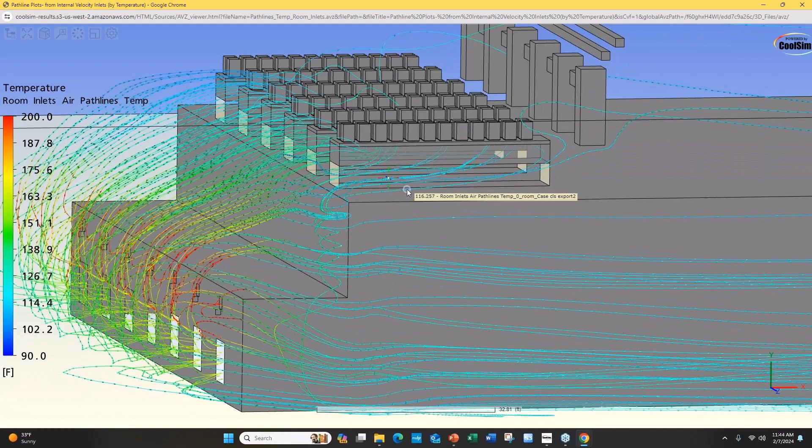And that's what's going to cause a few of them that we just saw to be hotter than they should be. So then you say, okay, there's the problem, I see where we are. What can be done to eliminate it?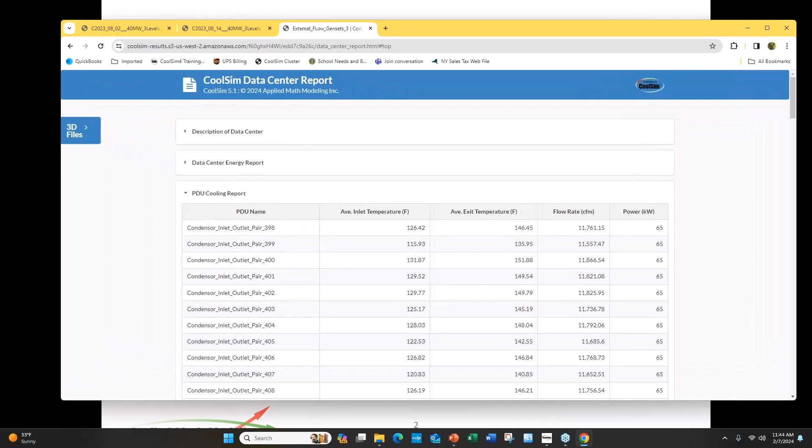Well, the first thought is to put a screen around it because that's normally what you do anyway. So I believe in the next run, I did that. So let me put this run down and then go here to this one and take a look at this output, and you'll see if we take a look at the same plot.

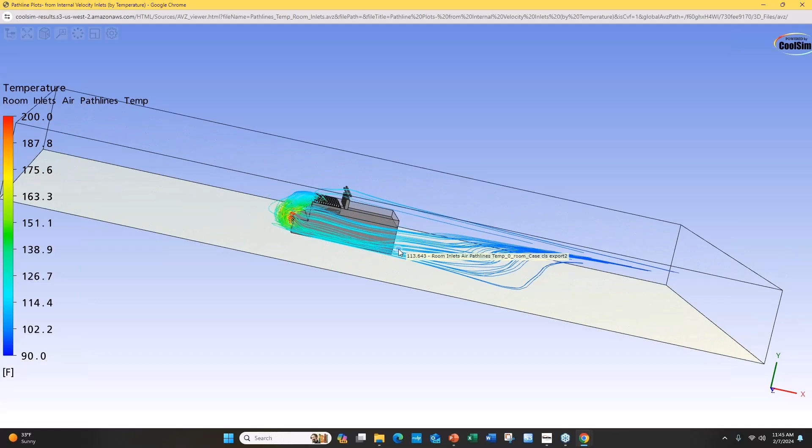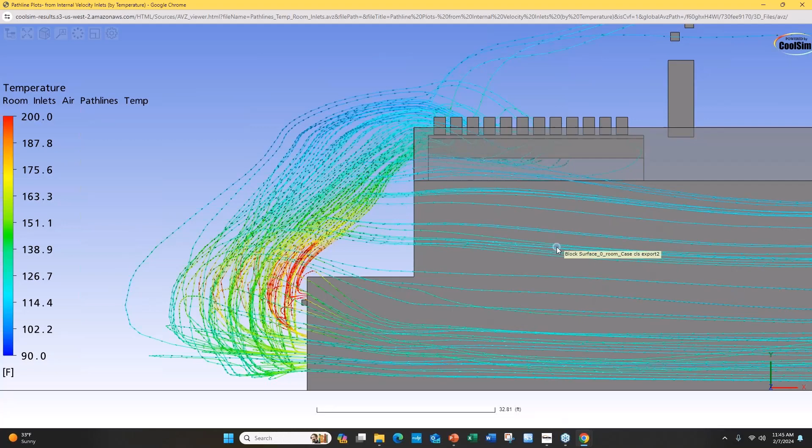By the way, these plots, these hyperlinks, can now be hidden underneath PNG images and put into a PDF report. So you can make all of your images that you deliver to your customer full 3D by simply hyperlinking the PNG or the JPEG, whatever it happens to be. Put the hyperlink behind the image, and when you deliver the PDF to them, they simply click on the image, and if they're tied to the internet, a browser pops open and a 3D image comes up, and they're able to manipulate it themselves. This is a beautiful way to make reports, and something I've been trying to do most of my life.

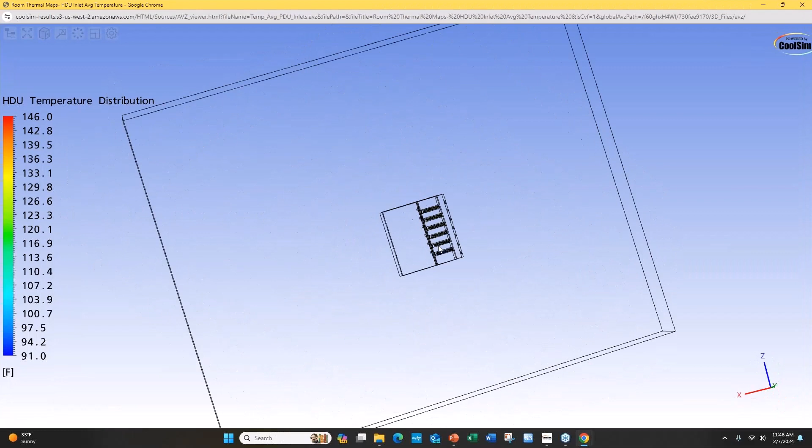These are the condensers, the heat exchangers. And let's see -- yeah, you can see it helped. It helped, it brought them down a little bit. So now we're down in the 120s. It did help, and again, how much it helped is a function of cost -- is it cost effective? So CoolSim doesn't talk to you about cost effectivity.

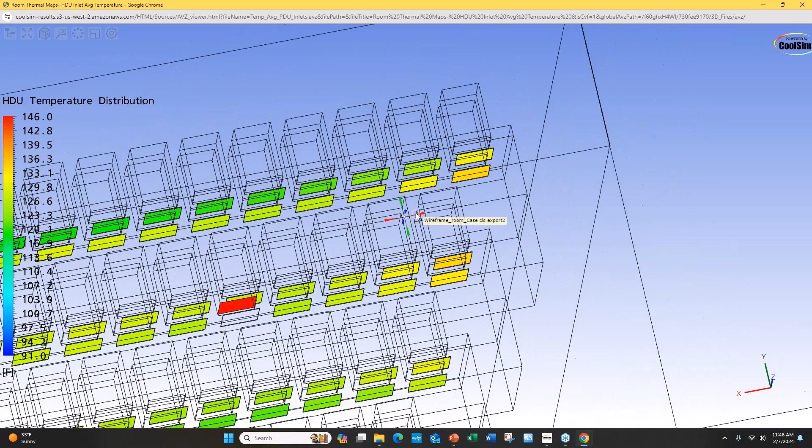Looks like we got an outlet wrong there -- you can see it right there. That's not correct. In the post, it posted an incorrect outlet right there. But yeah, you can determine the impact, and then the cost is something that has to be studied dependent upon the situation. So that's the kind of thing we do.

In summary, we're getting close to the top of the hour, and I want to leave it open for questions. There's a few here I haven't gotten to.

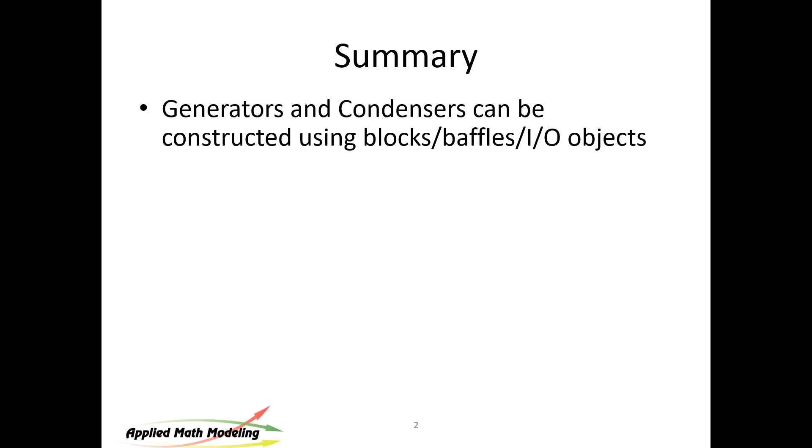They can be constructed fairly easily with blocks, baffles, and I/O objects. Once they're created, you can group them, which is the same as an assembly, then save them, clone them, or rotate them. You want to be sure your objects are set up to reduce mesh density as much as possible, align them as perfectly as possible, and get your inlets and outlets to match the block size.

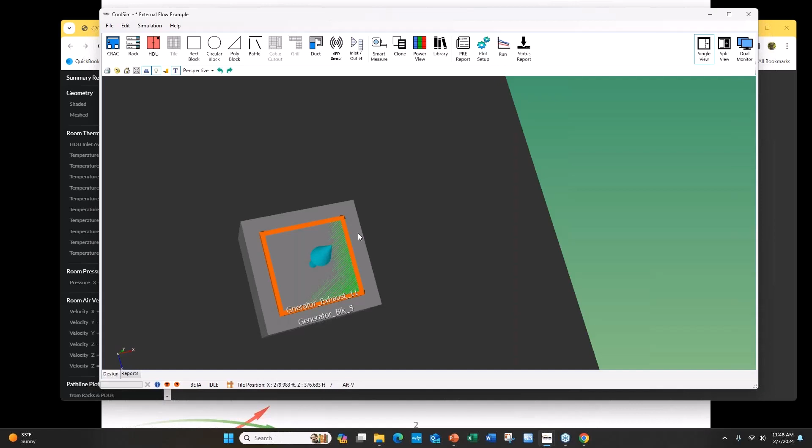Let me take you there again, and we're going to pop into CoolSim for a moment to make that point. In making your inlets and outlets, try to make the outlet as close to the size of the block as you can. You see it wasn't done right here. The inlet, in this case outlet, is not quite the size of the block. You should make it the same size so the mesh doesn't have to do a double mesh. You're already meshing this surface, but you'd also need to mesh this surface independently, and that's a very small geometry for a room of this size.

Now, with respect to these on the side, same thing - try to go to the edge if you can. This one is just about near the edge, but there's a gap right here that you'd like to stay away from. This one should have been done with the dimension in this direction equivalent to the size of the block, bringing it right to the edge if you can, if there's not another inlet there. In this case, there's not. So I would have made this one the width of the block, and brought this outlet up to the edge so you don't have to mesh that surface around it.

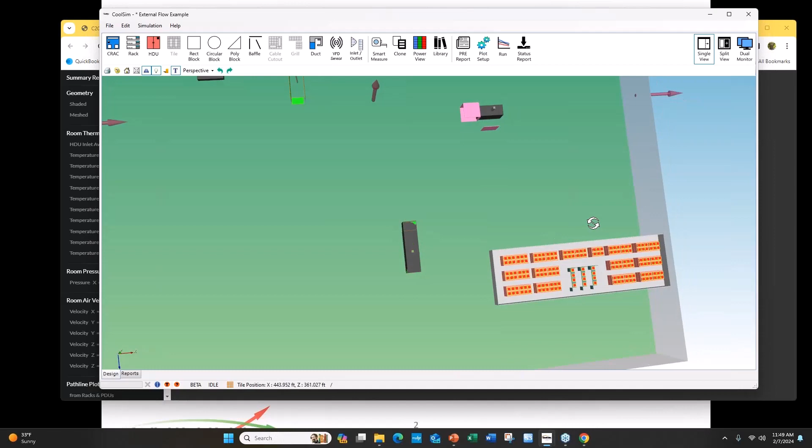That's what we do on our regular structures like this one, the PDU here, or the HDU. You see that outlet is equivalent to the size of the block - that's the kind of thing you want to do. It's not imperative, they still work, but it meshes a little bit better if you get them lined up perfectly. In a case where you've got them on either edge, you do need to leave a gap.

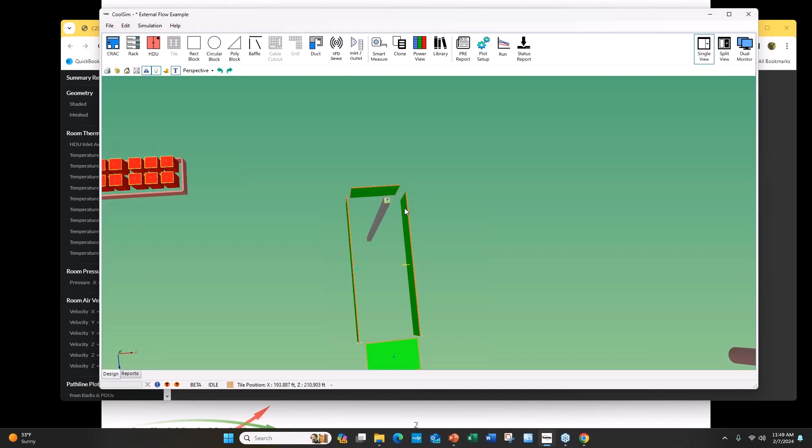For example, in this case we had to leave a gap between those edges because you've got an outlet there and an inlet here. If they touch, it sometimes causes the solver to get confused about which is which. So we've had to leave the gap right here on that leading edge in order to keep them separate from one another. Just a couple of tricks about how to build good structures.

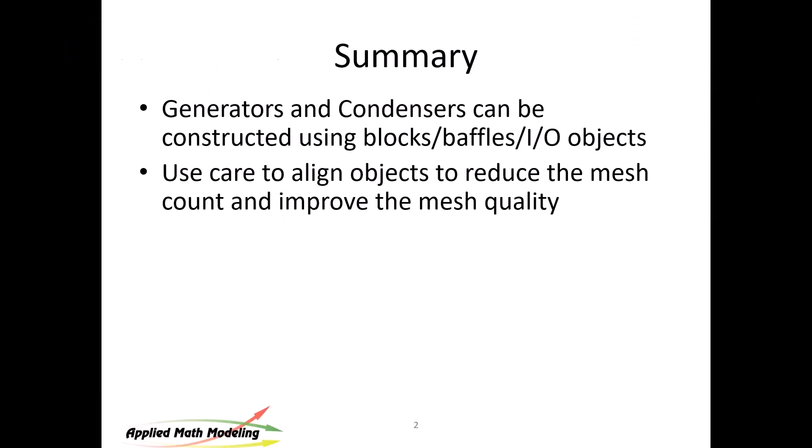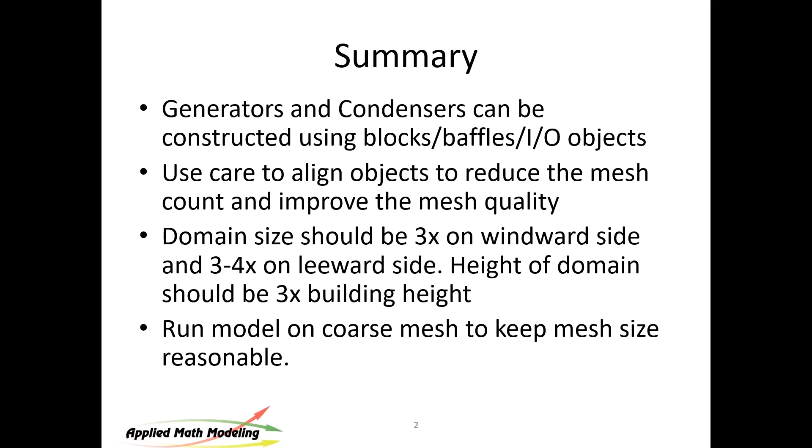The domain size should be about 3 times on the windward side, 3 to 4 on the leeward side. Height of the domain should be about 3 times the building. Run them on coarse - we've got enough mesh. The coarse mesh setting on CoolSim is the most robust; that's the one we've spent the most time optimizing, and it will give you the best output. Runtimes on these jobs tend to be 2 to 3 hours per job.